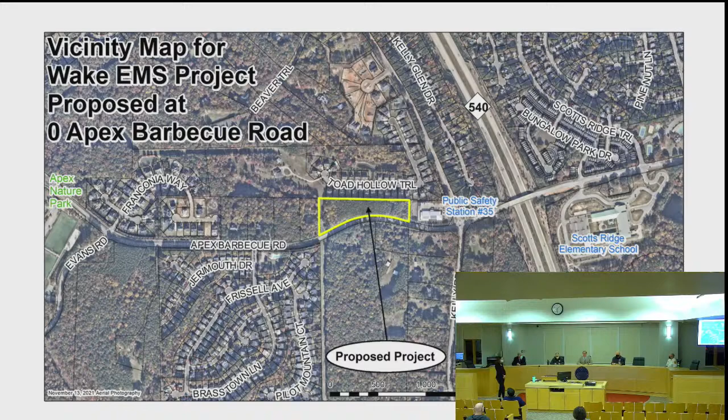The building is, of course, an EMS station. It's 4,300 square feet with 3 emergency response vehicle spaces. We will not be occupying all 3 of those right away.

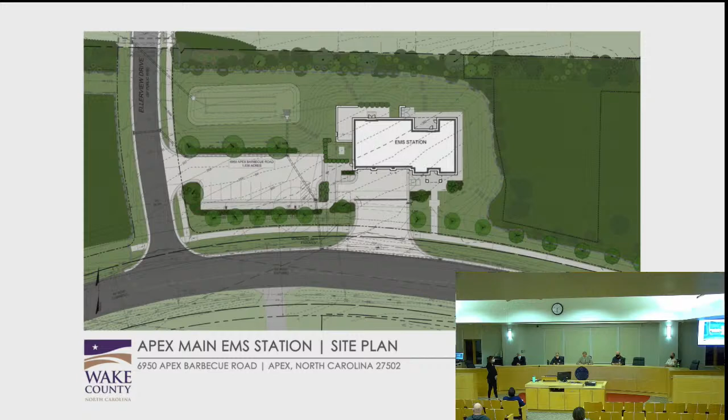The emergency drive apron connects directly onto Apex Barbecue Road, shown at the bottom of the screen. The emergency drive is constructed to enable vehicles to turn around on the driveway, so we won't be blocking traffic on Apex Barbecue Road. You can see the modified hammerhead on the left side of the driveway up closer to the building—that's our emergency driveway, a dedicated drive.

We're dedicating 10 feet of right-of-way along Apex Barbecue Road. Besides that additional right-of-way dedication, we're accommodating a utility easement, a thoroughfare buffer, and a parking setback. Many of you in development and construction may notice it's a very narrow site—it doesn't have a lot of depth, so the north-south orientation is squeezed.

With the development of our site, we're adding a public sidewalk along Apex Barbecue Road, also proposed along the potential Ellerview Drive. This sidewalk will actually extend all the way to Scotts Ridge Elementary School, giving the neighbors and residents of Kelly Glen a pathway all the way to the school.

We're also widening the northern portion of Apex Barbecue Road, at the lower portion of the screen. It's approximately an 8-foot ribbon pavement plus curb and gutter that we're installing.

The current Ellerview Drive improvements are required by the town as part of the UDO. Those run along the western portion of our EMS site plan. These improvements include the road cross section, curb, gutter, sidewalk, and storm drainage.

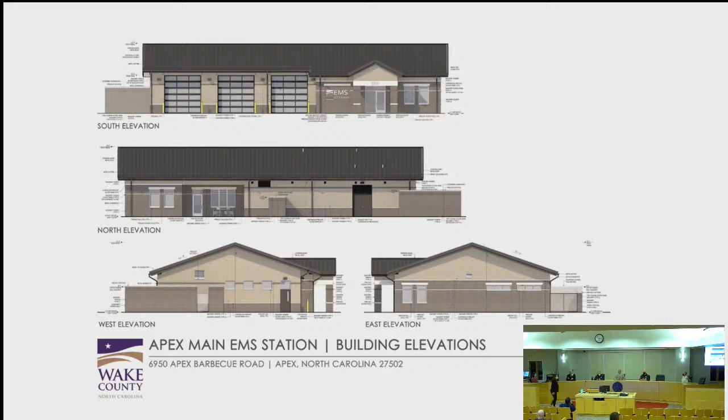Okay, thank you. Before we get into discussion and your questions, this starts to get at the question about the review process and what's required. The Wake EMS project is considered a minor site plan. The town has different types of plans, and this category is a minor site plan because it's less than 100,000 square feet of non-residential floor area.

So for minor site plans, meetings like this aren't required. We don't have any neighborhood meeting requirement, so we're really appreciative of Wake County for coming out here and helping us address some of the concerns you've raised. There's also no public hearing required.

Minor site plans are reviewed by staff and approved by staff. Following minor site plan approval, Wake County will request to be annexed into the town, and that does require a public hearing. So that's the approval and review process.

The staff reviewing minor site plans are called our Technical Review Committee, composed of employees from 9 different departments, not all represented here tonight. We have electric, utility reviewers, water resources, parks and rec, planning, emergency services—most departments in the town are represented on that committee.

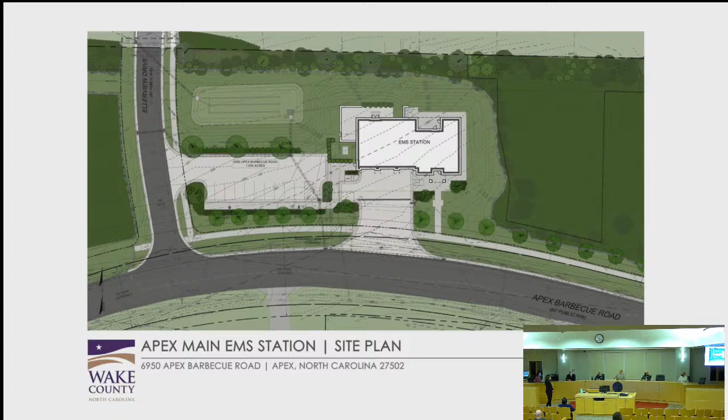Everywhere you look around the building, particularly out to the east, we're getting positive drainage and a drainage swale around the building, and that water is still being captured on our site. This is a fine blend of, we can't be too hot, we can't go any lower or else we're going to get into retaining walls and other problems. You know how it is as a developer, you have unintended consequences. So from our design team standpoint, this is the perfect blend of elevations all the way across.

And so I hope that helps, and we'll be glad to get into greater detail as the CDs come along. At that point, we'll be getting profiles and things of that nature too.

Another question? Just a follow-up: does that mean you'll have a retaining wall on the western edge of the property that runs along that tree buffer, since the building pad is at 362? So the current plan is to not have any retaining walls. That's our current design intent.

This image just shows Ellerview. I think the previous one showed that west of Ellerview was also part of this project or plan. Am I reading this slide correctly? Does it go west of Ellerview, or does it stop there?

So the county owns the entire western parcel. It's Tom, right? Yes, good to see you again. The county owns, or will own, the entire western parcel. We don't own it today. It's part of the process, a condition precedent to closing. This particular site plan is addressing the EMS station specifically. We are not developing the western side at all.

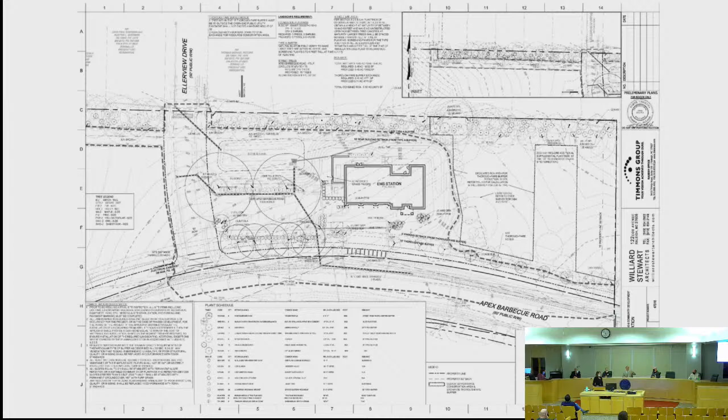We brought the landscape slide just to address that issue of the sanitary sewer. If you look at the slide, the upper portion is an inset, extending from the Ellerview right-of-way over to the 50-foot gas line. There's an existing sanitary sewer manhole and line over on that part of the property, and that will be our sewer outfall. So thank you for that.

Can you let me know when it's appropriate to ask questions? I know you said at the end, more general questions. Yeah, we're trying to get all the questions on the table so we make sure we have time for everything. Did you have another?

That's not... yes, you mentioned in that thinnest part of the buffer on the northern edge where the houses are, you are going to supplement whatever plant material is there with additional plant material. Will you be...

I'm going to repeat it just in case people can't hear if they're viewing. So the question was about the buffer on the northern part of the property, if it would be supplemented with additional plant material, and if the specific plants are known at this time.

So, Tom, we conducted a tree survey. If you look at the green image, everything that's green and not articulated with a black border or a dot, that's your existing tree canopy. The new material has the black dot with the black outline. All of that is plant material to supplement the existing buffer.

But the town goes a step further, and I think you'll appreciate this. In the UDO, to get final approval, they actually have to walk this buffer and make sure the opacity really exists. We all know things look entirely different in plan view than they do in real life when we have them on the ground.

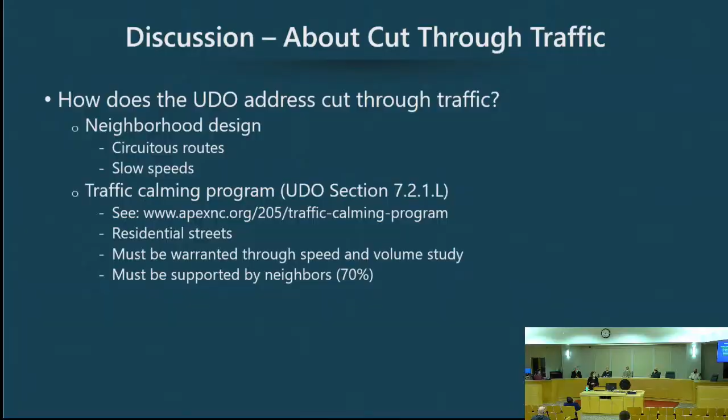So that's what the UDO says about street stubs and traffic calming, and I'm sure you have more questions and comments, so please go ahead.

Since even if this clause in the UDO is applicable outside of the subdivision part, right, it talks about shall be provided. There's no...

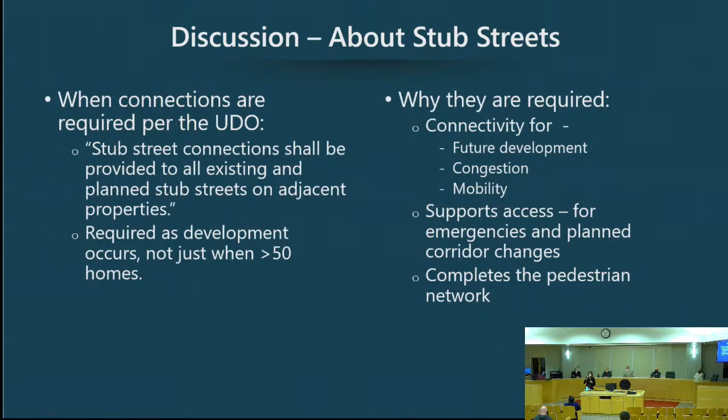So the question was, why place the EMS facility on this portion of the overall parcel, since it is narrow in this location?

That's a great question, and it's actually one we've asked ourselves, why this specific site? A lot of it was driven by... let me back up. You're right, we had an opportunity to go east or west. It was the perfect storm. We could develop the western parcel or the eastern.

The first thing that's great about the eastern side is the proximity to the fire station. The other thing is the extension of Ellerview actually works in concert now with how our site plan develops. So being closer to that, from a development standpoint, is good.

The topography, as you go further out to the east, the elevations Imran mentioned actually get worse. There's a family that I think has a pool, and I noticed the elevation between the fire station and the residence there is dramatic. We would experience a little bit of that same phenomenon. So from a location standpoint, a topography standpoint, and a public infrastructure standpoint, we identified this exact spot as perfect.

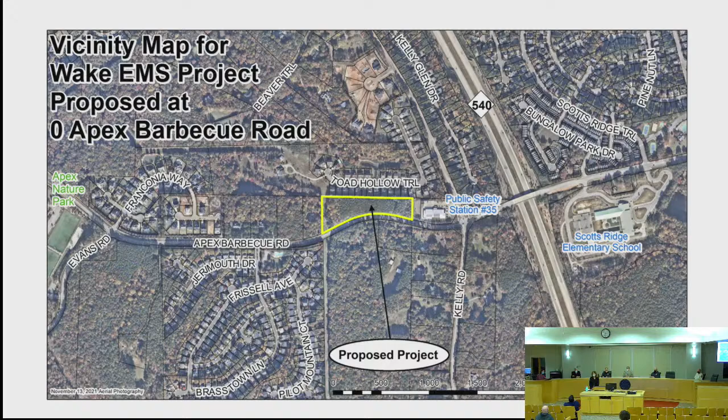In the event that the town council approves some kind of a text change or an amendment to the UDO that would not require a connection to Ellerview, is it feasible, from the planner's perspective, to build another stub street, so it's like two stubs that are not connected? Is that the right approach?

If you look at the site plan, and you all may want to speak to that, the parking lot is connected to a portion of Ellerview Drive. So I would anticipate that they would still build an apron up to that parking lot connection, which gets at what you were commenting about. Would you basically build two stub streets? That is not my understanding. Maybe someone, or Mr. Morris, can elaborate.

Sure, that's a great question. What I envision by your question is: go ahead and build Ellerview to the point at which we need it, and then stop. Then allow the existing part of Ellerview to the north to remain as it is until some future development precipitates the need to connect the two.

That's really a town decision based on the UDO. Our site would work in that regard. There's not another real benefit to our project for that connectivity. There will be some ancillary benefit to you all at some point relative to response time and things like that, though I know that's not a priority right now at this level.

So the two stubs, if I described it correctly, in my mind doesn't injure the project in any way. There are connections still being made—there's the storm connection coming out of the BMP, that would still occur. The town's perspective on the sidewalk extension that Tom mentioned earlier is still a consideration, and I think a big value add to the community, but that's me looking from the outside.

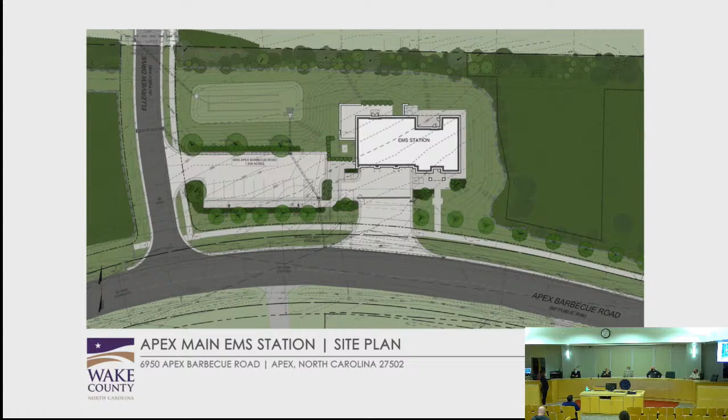I was going to say, there's really no difference. It gives us another access point, and another access point is always good. I don't know if fire feels differently, but from a response time standpoint, we can go either direction.

The other consideration would be school buses, which you mentioned. Wake County Public Schools has told us that well-connected neighborhoods are very important for them, so they don't have to make turns in and out, going on thoroughfares, stopping in cul-de-sacs. They've provided that feedback regarding school routing and other deliveries.

I don't think that's going to be an issue. When we talk about getting connectivity to public roads, I can safely say we all purchased our homes knowing there was one entrance and exit, and the neighborhood at the moment is not set to expand. I don't see that as an issue since it's something we all bought in knowing.

As far as the county public schools, I reached out to them. We have one bus stop that feeds the neighborhood. Before, with the year-round school calendar and the traditional calendar, we probably served 6 different schools, but I don't think they're having any trouble. Our neighborhood is unique in how it's set up, with only 37 homes—47? 48, I believe—and very little room at this moment to expand.

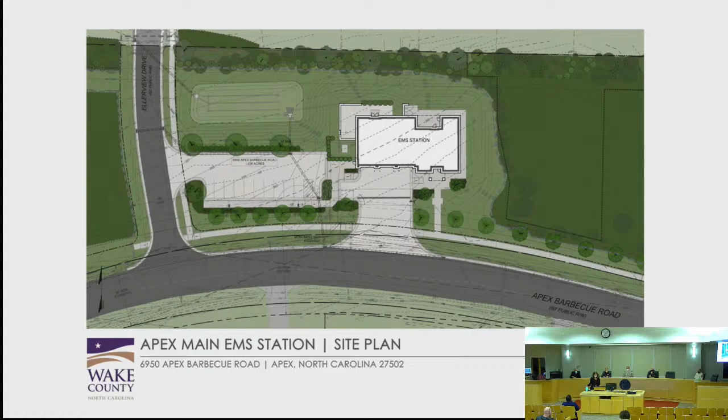Wake County is working on their third submittal of their minor site plan to the Technical Review Committee, due January 14th. The committee will review it, and it may or may not be approved after that submittal. Their current plan, if they stay on track, is a February 22nd public hearing for the annexation portion, with construction expected to commence spring to summer 2022, and building occupancy about a year later. That's the project.